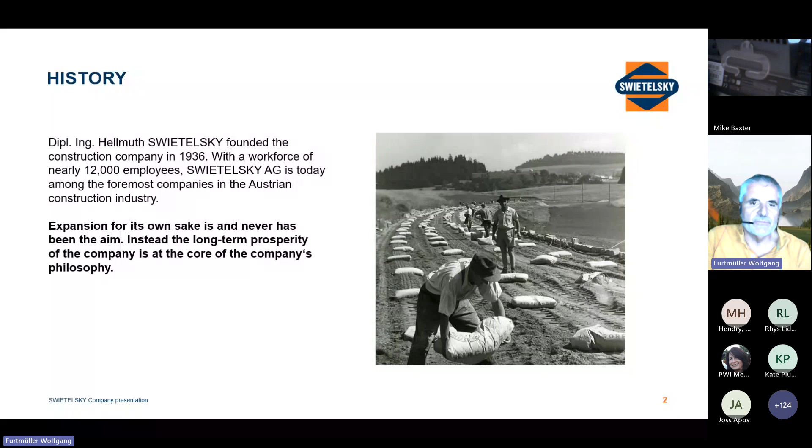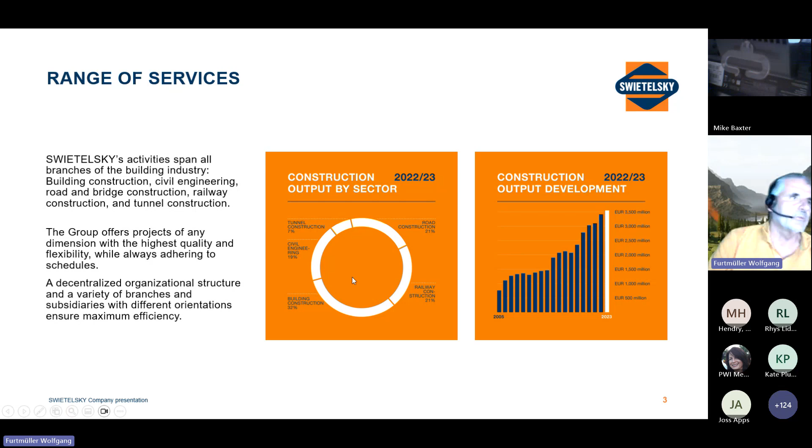At the moment, we have around 12,000 employees. And we have different departments, which are explained here. We have tunnel construction, we have civil engineering, which Atros is also part of, building construction, railway construction, and of course we also have road construction. Total turnover, as you can see here on the right side, is around 3.5 billion euros from last year.

Especially in railway construction, you may know the company already because we are acting in the UK. With railway, we are acting almost worldwide. So we also have a subsidiary in Australia, as far as I know, and all over Europe.

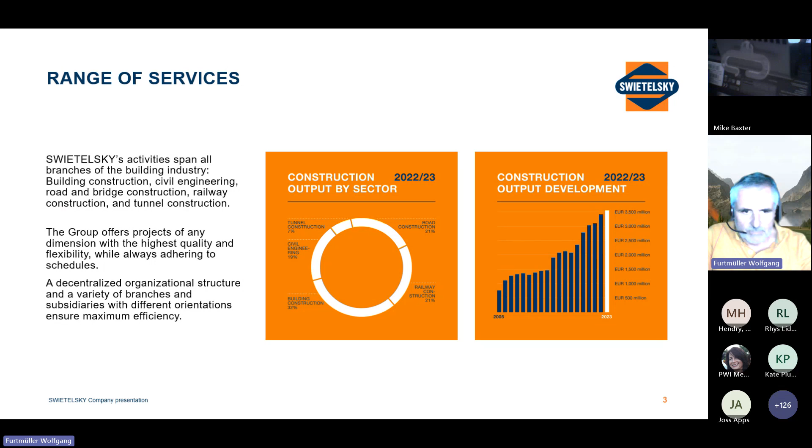Michael Zeitler, I want to apologize for him because he is on an urgent trip and couldn't participate. He is the manager of Swietelsky UK. So now I have a little bit of a problem with my... Okay, next one, guys.

Okay, let's go into Atros. Atros is originally the name, and the company comes from Italy. It was founded in the 70s and taken over by a small Austrian company. And they did the construction quite well in Austria. Atros does everything that means moving construction. So everything that is heavy and needs to be moved, we do this job.

This small company sold, at the end of 22, the company, or this part, to Swietelsky Austria. And as we see, the market for these specialized things is quite limited in Austria. So it's a very small market, and we're trying to establish this now in Europe or even worldwide.

First of all, I want to show you some things which you already know, everything we are doing, and then our newer developments, several projects we already did. This one is insertion on rails. I guess everybody knows insertions. This is quite famous all over to reduce the interruption of the public railway.

You build the construction beside the railway, beside the dam, and then make the excavation on the dam, stop the traffic for 1 week or 10 days, depending on the size, and then you insert this one. Our new part here is we do it on rails. This is developed with the Federal Austrian Railways, has several advantages, of course also some disadvantages. In any case, it reduces the friction and it's quite fast to do.

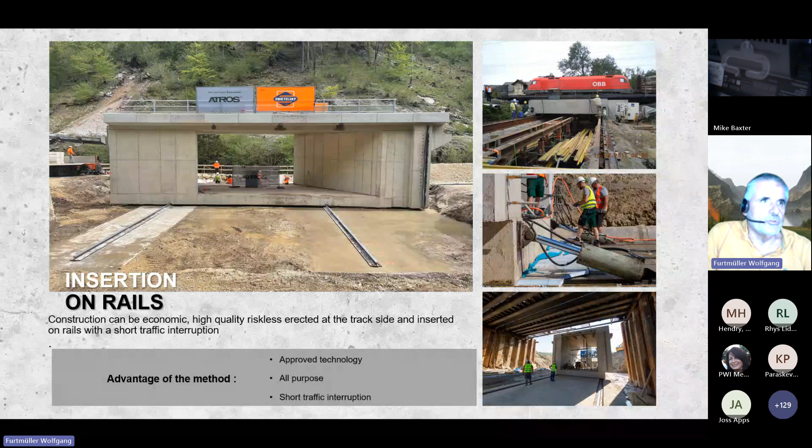Some examples. These projects are all in Austria. One in Golling, 2017. The load, the concrete, was 900 tons and it was 15 meters to move. And the speciality here is you have to lift the whole construction 15 centimeters, which is quite a challenge because there's very limited space.

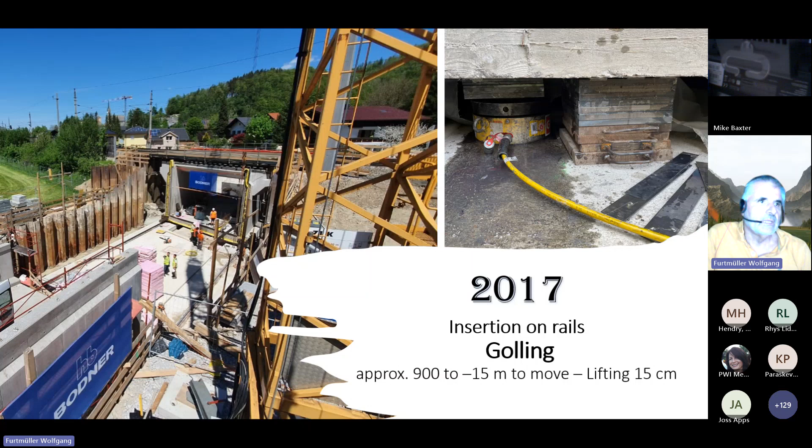Okay, then the other one is Hieflau, weight 850 tons and length of 15 meters. Here on the left side, you can see this picture with this special equipment to move the concrete, to move the whole construction.

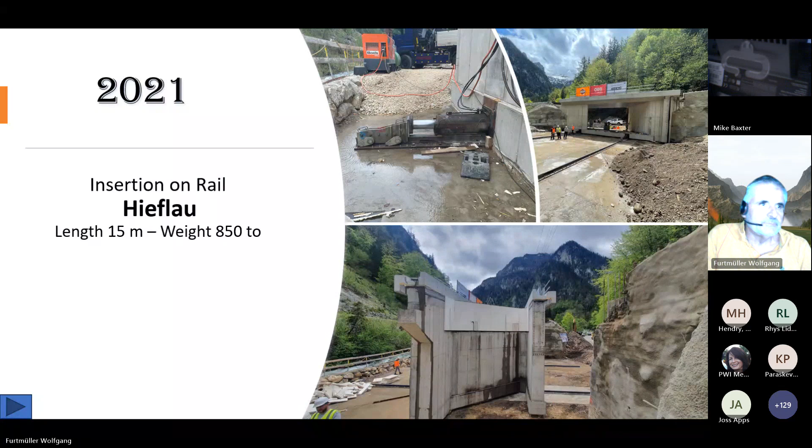I have prepared movies, so please interrupt me and tell me when there is some buffering or it's not running smoothly. We tried it, it works, but nobody knows how stable the line is. Okay, I switched off the music, there is only music.

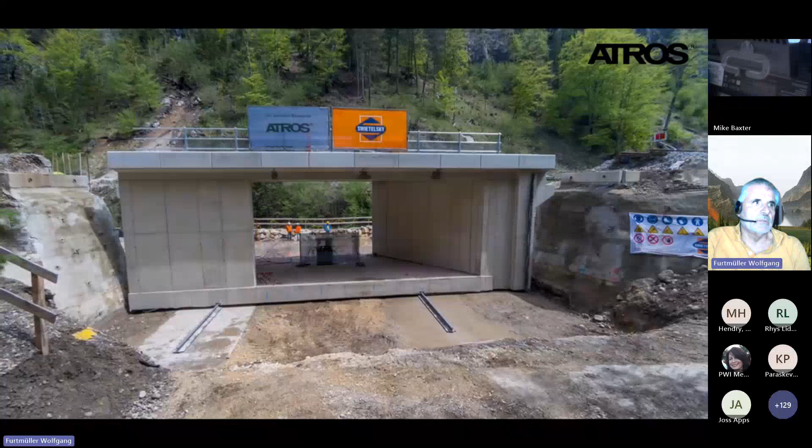You see here the moving itself takes around, let's say, 20 minutes. In 20 minutes, the whole thing was done. And we can then later make a short stop of the movie.

Yeah, here, oops, sorry. This was a mistake. Okay. I don't want... Okay, once again.

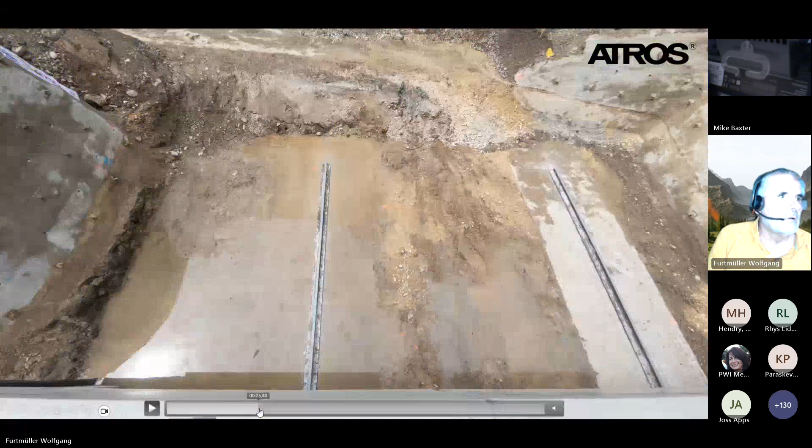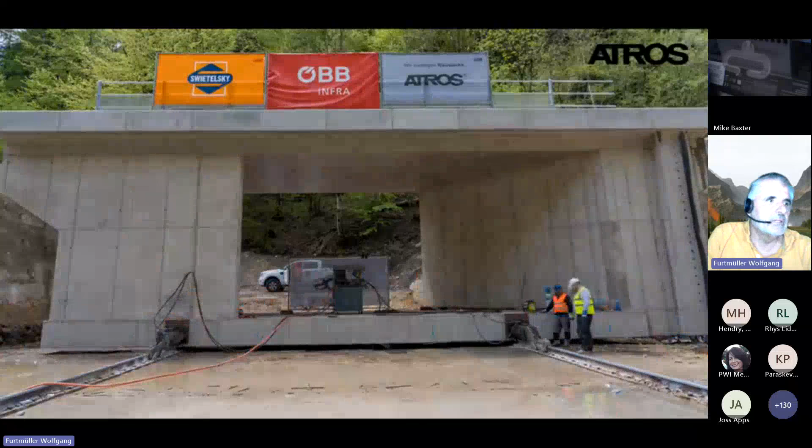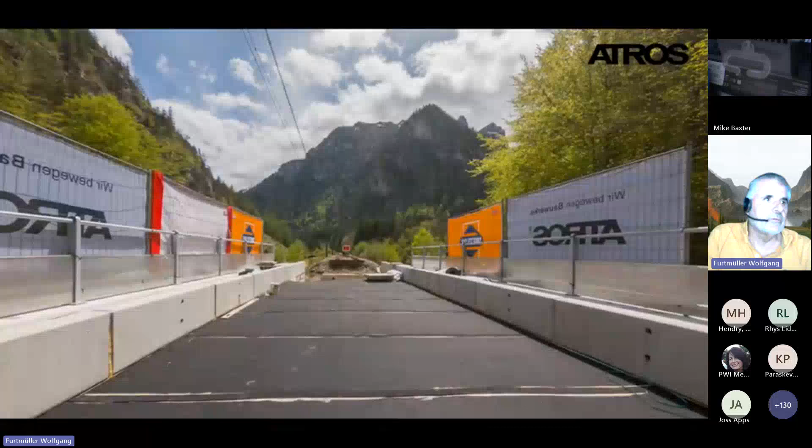Okay, here you see this is the special part. You see the support, how it's supported, and later on you can use the rails. You can also see there is some grease on the top, some special material for sliding. Later on you fill up the embankment, install the rails, and yeah, that's it. But in any case, it takes a few days, maybe 1 week, maybe 10 days, and you interrupt the public transport.

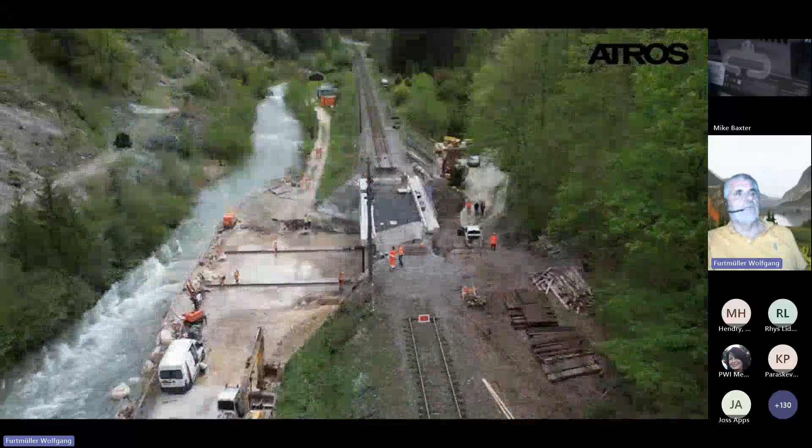Yeah, you see here on the left side, they're already removing the rails. And yeah, so.

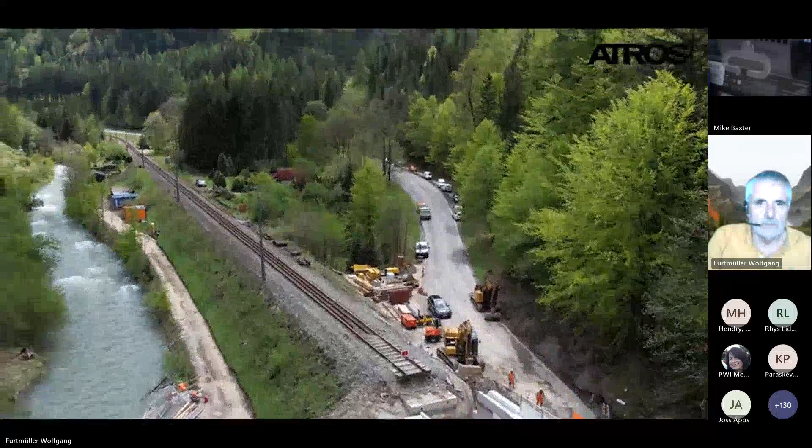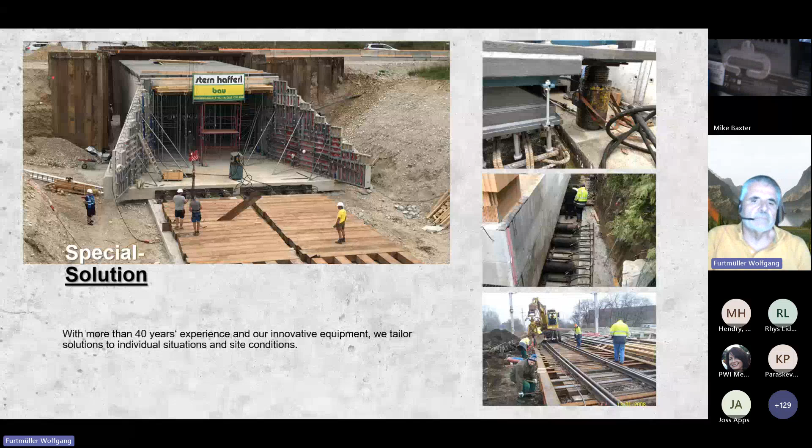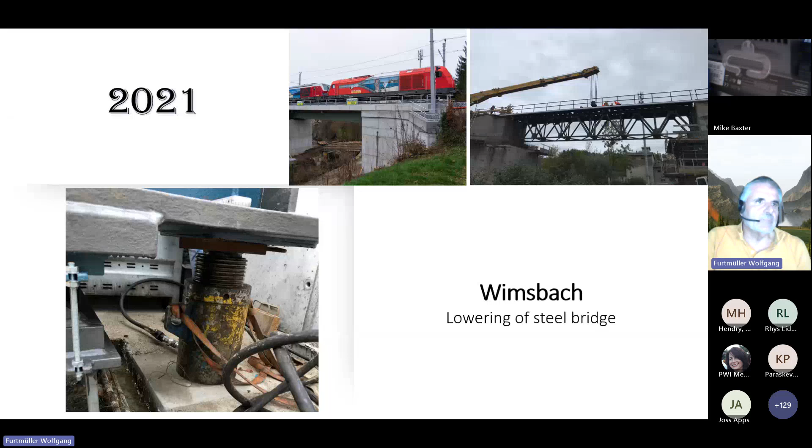Okay, it's finished. We're also doing some special solutions. If there is sometimes, for example, we had lowering of a steel bridge. We're doing also this kind of jobs. We're doing also insertion under a federal highway, because this is basically also possible. But this was only done one time.

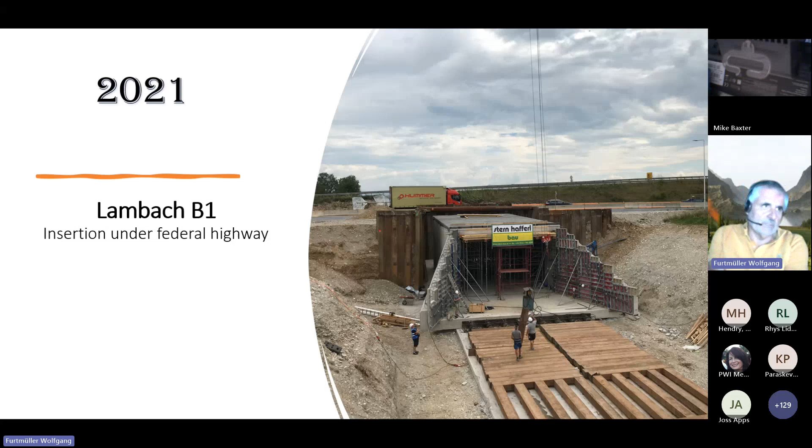In autumn of this year or maybe next spring, there will be a job in Austria for the state highway company. They want also insertion under a highway, so we do it the second time. We're trying to do it the second time.

Insertion of a steel pipe on the hydropower station. Here you can see above this man in the red jacket, this is the flow, the channel. Otherwise you'd have to stop the channel and stop the whole project, the whole electricity production. We insert a pipe under this channel. This pipe is for fish, will later on be a fish ladder.

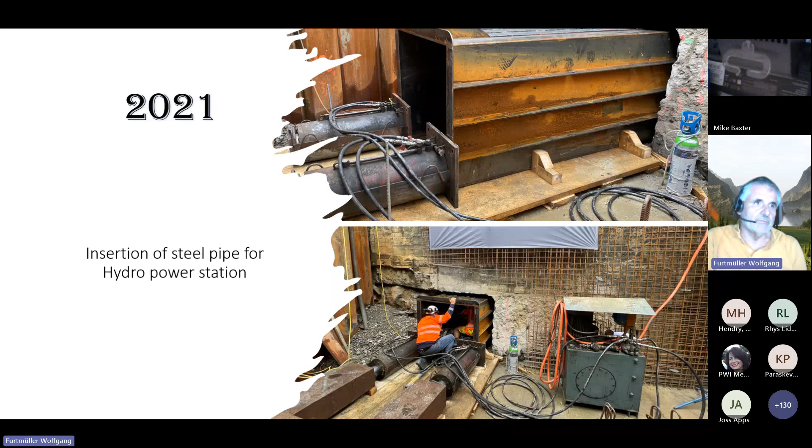And maybe a little bit funny thing was the moving of a single family home. They made a mistake and the family home was 15 centimeters too near to the border. As the regulation is very strict here in Austria, they had to remove the house. This was one possibility, and the other possibility was just to move the whole house 15 centimeters to the other side, away from the border. So this was also possible to do.

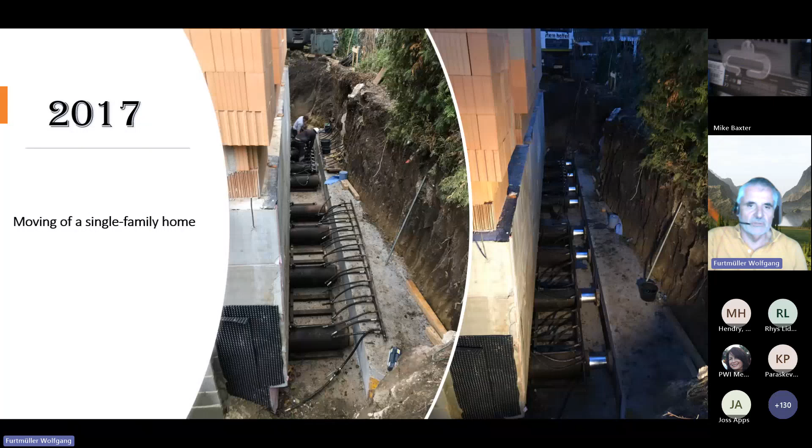So now this is some general overview. Now we're coming to this jacking below tracks, which is a little bit more challenging. Our target was to try to reduce the interruption of the public railways to a minimum, or let's say to zero. And there we had 41 projects, already the experience of 41 projects.

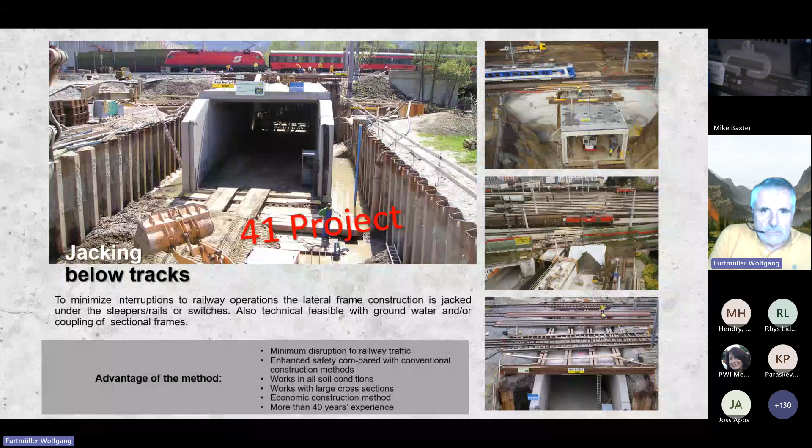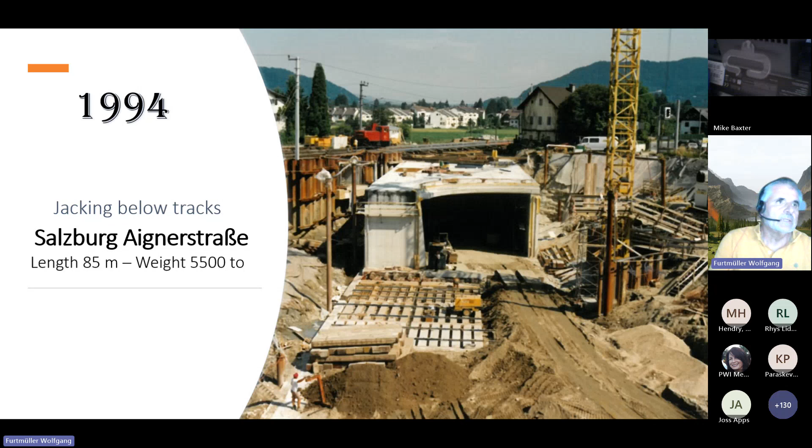You see here how it goes on, and the train runs continuously, of course. We reduce the speed a little bit, to 60, 80 kilometers per hour. There are also some examples. This was 1994, a length of 85 meters, and normally we try to make it rectangular to the track, but in this special case it was not possible, so we had to prolong these temporary small bridges.

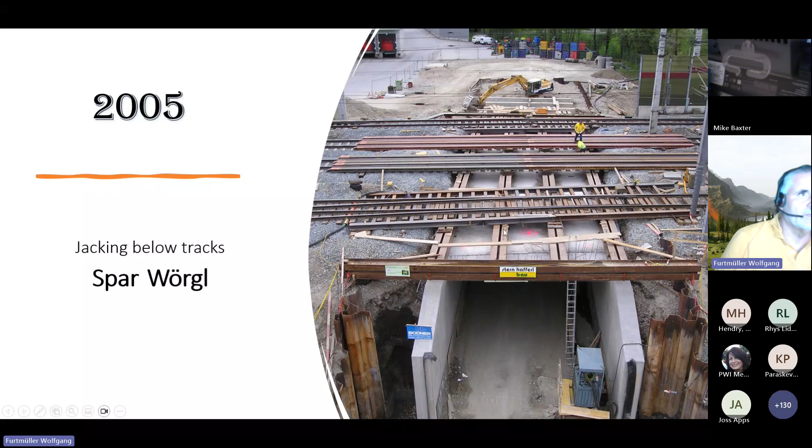But it was successful in the end. Regarding the temporary bridge, I guess this should be well known to you already. You see here, do you see my cursor? Can you see this? It is here beside, let's say, steel bars. Quite easy - there's the rail in the middle, and left and right is steel bar supporting the track, the rail. And this is supported, and later on, as you can see here, this is already supported by the ceiling, supported by the beams that we have.

How we do it - also the moving, one project from 2007, we have a quite good picture. This is tank steel rollers, and on these tank steel rollers we are moving the I-beams here and here to this side. So this will be taken in, I'll show you later on a movie as well. This was taken in, and the excavation is continuous during the moving, doing the jacking.

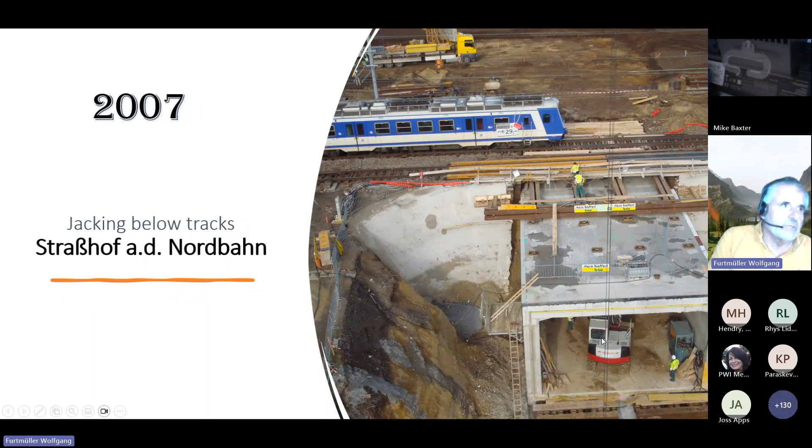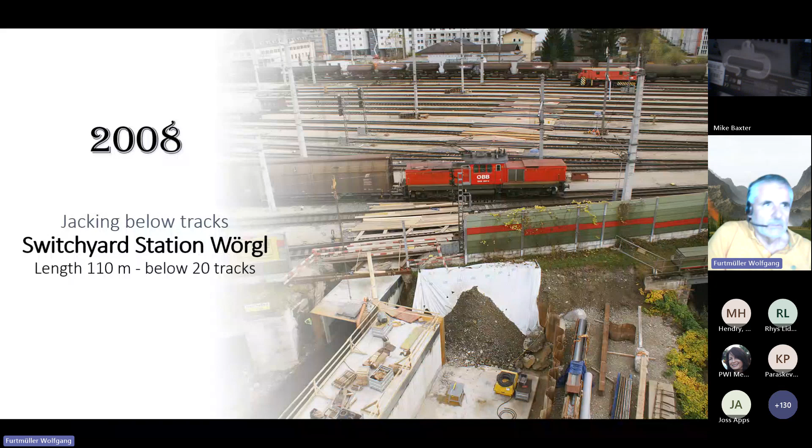One example - so this 110 meters we did not make in one step. We made it in 3 parts. And this goes like a caterpillar: moving, pushing, moving, pushing, moving, pushing, all together at the same time.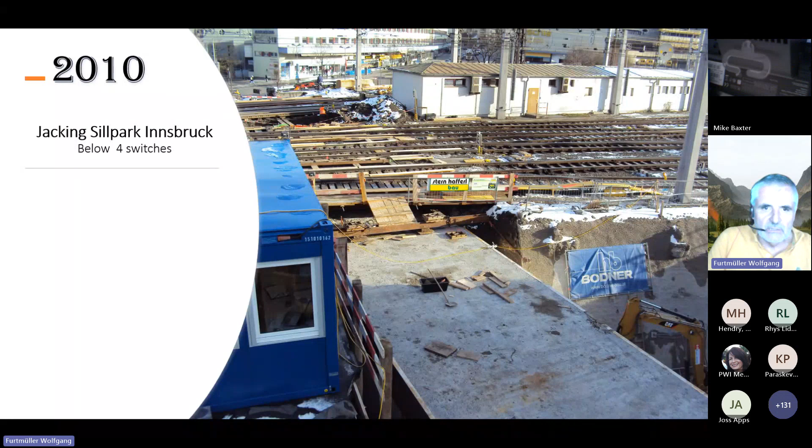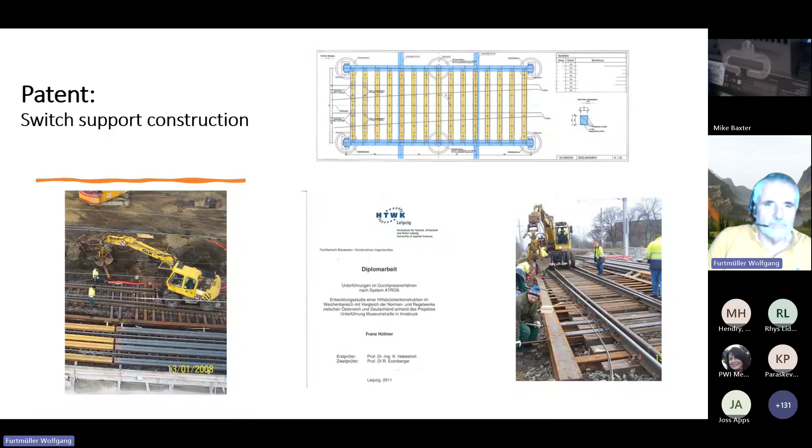Sorry, what I wanted to explain before already - this is below the switches. Below the switches is some extraordinary challenge because it's not that easy. But we also investigated and we got a patent for the switches. And the switches - how to move this one - there is a patent, and there was a master's thesis done for all the static analysis which had to be done. Okay, this is part of the patent.

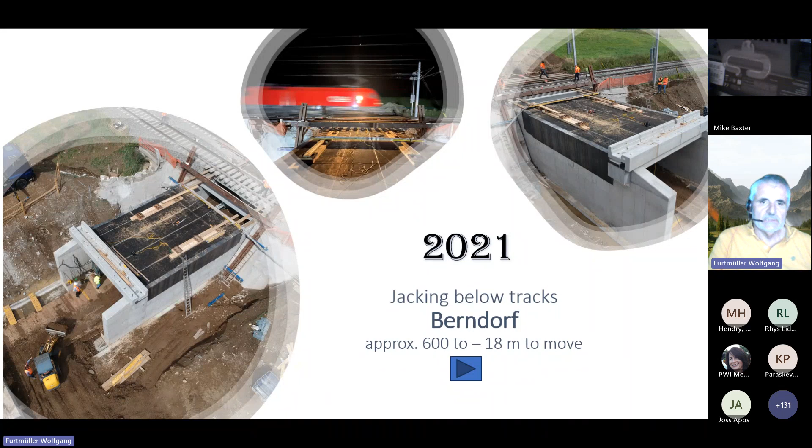Okay, then from our last project in 2021, this is Berndorf. To explain a little bit, this is the connection between the north of the Alps and the south, so from Vienna, as you can understand, to Italy, more or less. So this is also a quite frequently used track, and this you should not interrupt. Therefore, we have a movie also.

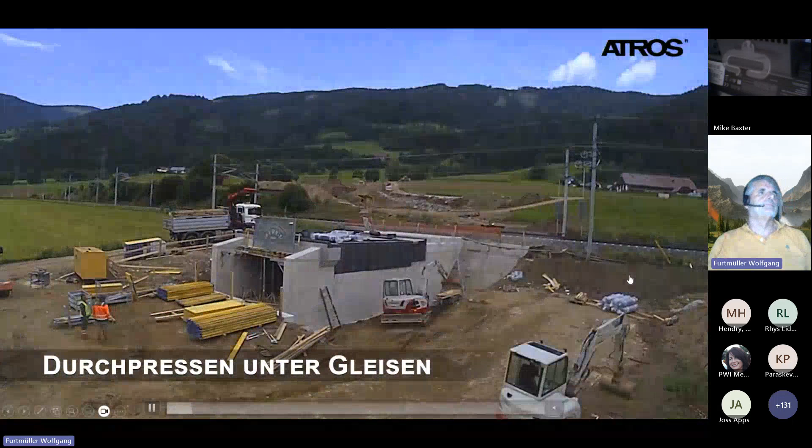You can see we construct this one. You see here this edge. Yeah, this is in front. There is steel, and this one will go through the embankment.

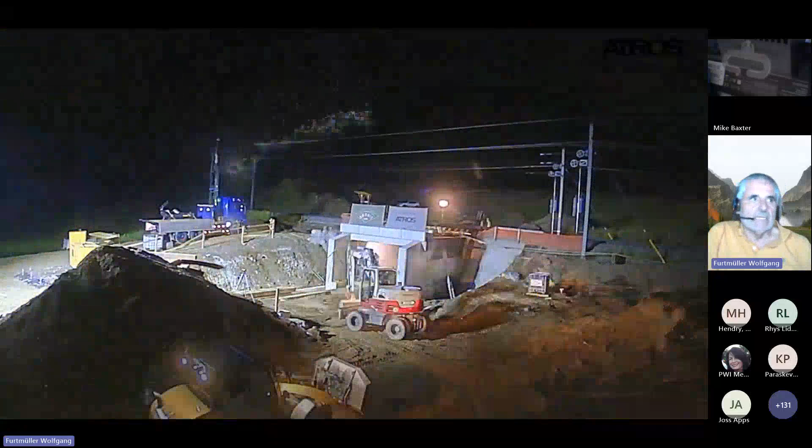Okay, this is the preparation of everything. You see from time to time also passing by a train. So this takes totally 3 days. Yeah, yes, you saw the trains. This is two lines and takes around 3 days, day and night shift.

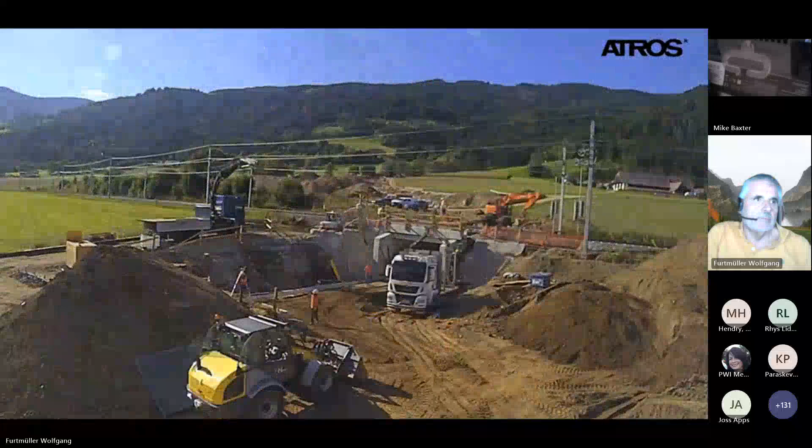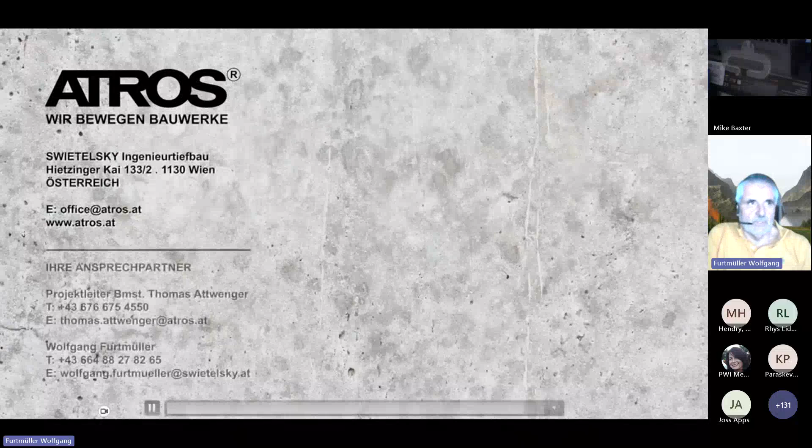Okay, finishing work. Then this side walls and project is finished. Sometimes you can't do it very close under the tracks because the embankment is too big.

And this is the connection between Vienna and Germany, so from East Europe to West Europe, and this is very frequently used. We already have 4 tracks there, day and night under operation. So to stop this one is quite impossible.

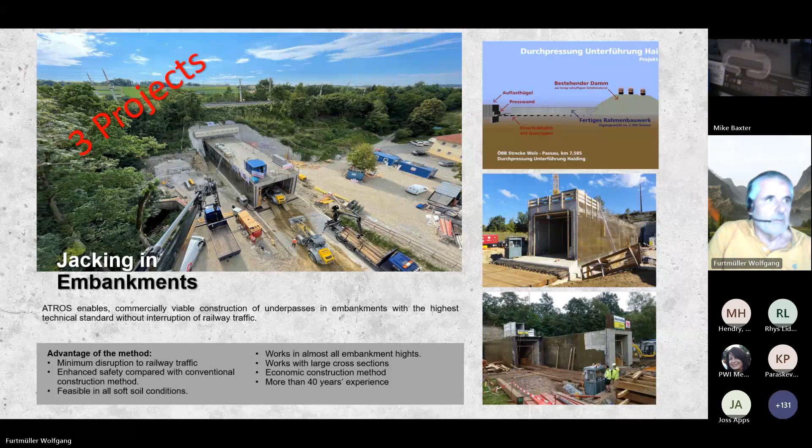Okay, from this one you will see later on movie also. Yeah, this was the project in Germany we did, 2016 in Obervellmar. You see here this steel edge. So this is the cutter or steel cutter.

This is the part which goes through the tunnel, and then you have the side walls left and right side, which will be later on removed. And we go through this one and continuously with the excavation. You see this much better in the movie.

Here you see on the left side in Obervellmar, this is the special case. There was already an existing underpass, but this was too small, too old, so they had space to make a new one nearby, and this one was just closed.

This was also done in two parts. Also again, moving and pulling the other part, first this one in, and then this one to the left side.

Because here, with my cursor around here, was a very famous, beautiful tree, impossible to move. For these reasons, we have to make it in two parts. Otherwise, it would be no problem to do it in one part, which is of course easier, faster, better quality and everything. But okay, impossible to change this tree, so we have to do it in two parts.

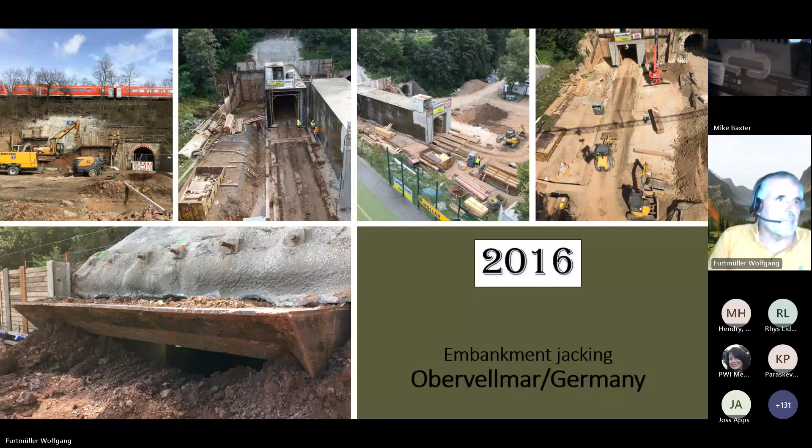2022, this was our last embankment, jacking in the embankment. This was done, as I said already, on this track between Vienna and Linz, or Salzburg is maybe more well known.

This was totally 48 meters long and 3,500 tons. And you can see here, this is the support wall. See here, this is already made.

This is the slab, which later on will be removed, of course. And then this slab, this built the underpass. Yeah, okay. And later on, the underpass was moved inside.

We used the excavation material to make a hill here, or let's say a better abutment, because the longer we are inside the embankment, the more friction we have, and the more pressure we have, of course, also to the other side.

Yeah, so later on you will see this one. What you can see here on the left and right side, there is some pipes. And these pipes, we filled the gap between the concrete and the material, the embankment or the soil.

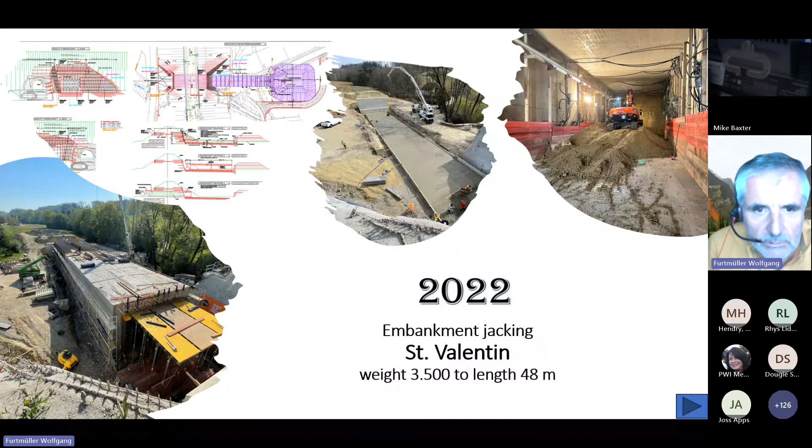Okay, I want to show you now the movie. Okay, why is this not working again? Okay.

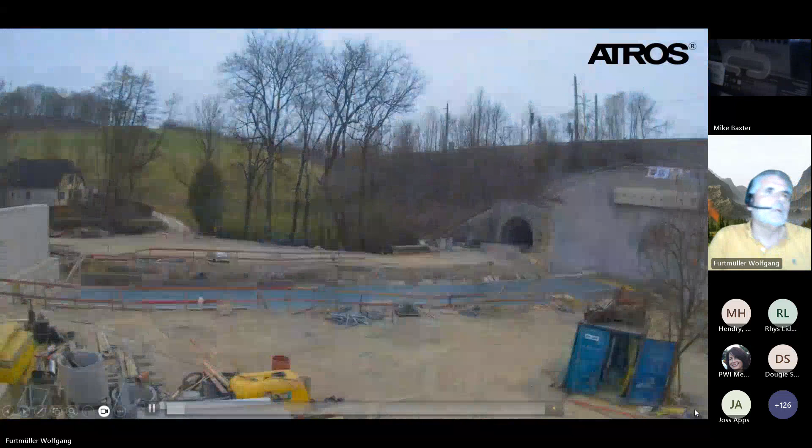Okay, you see here we're building the slab, this sliding slab. Then it's already done, the underpass itself, something like 4.80 meters high and 10 meters, 12 meters in the width.

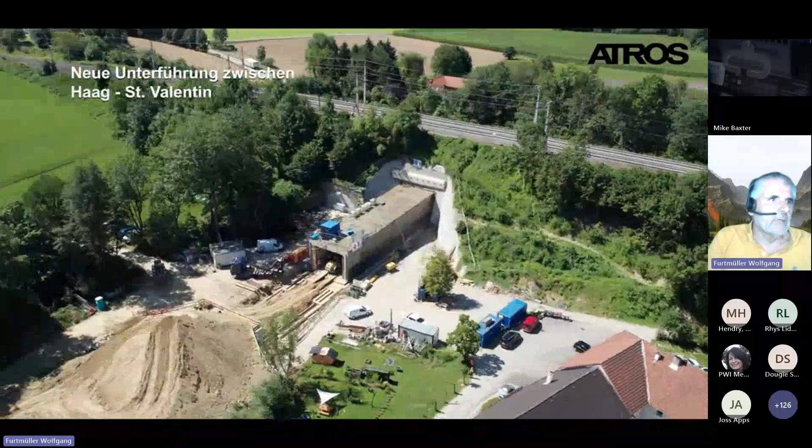Okay, this is half done. Here you see the temporary support. This is anchors going through the dam, which is supporting the dam. And of course, we have a little bit of settlement.

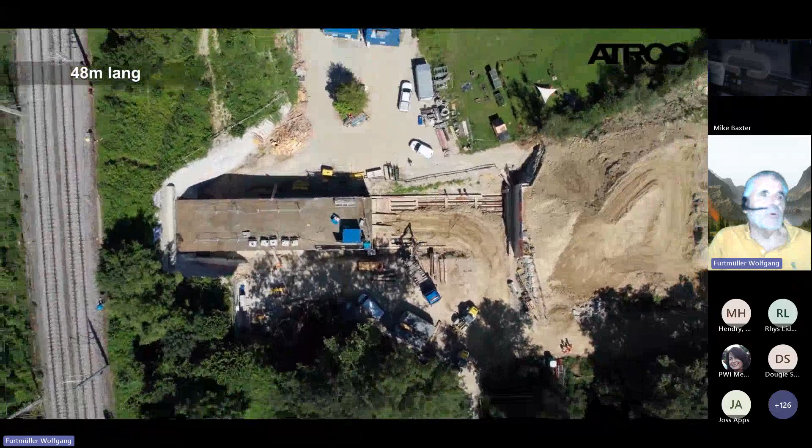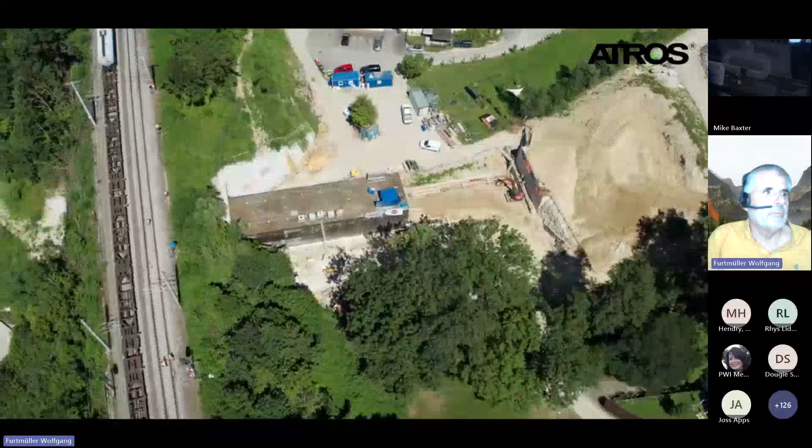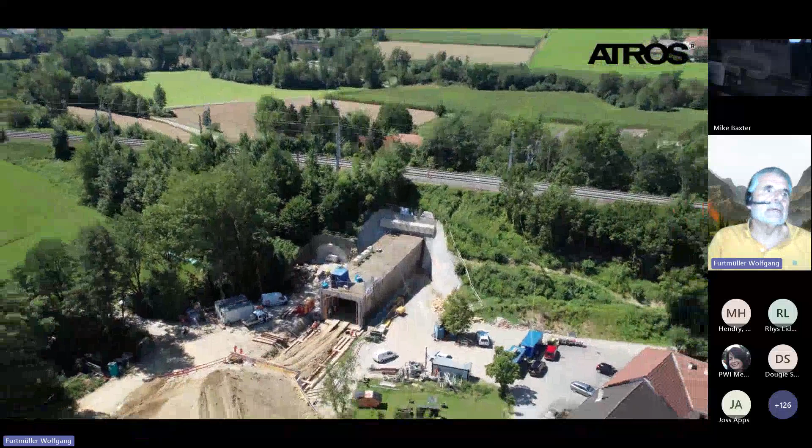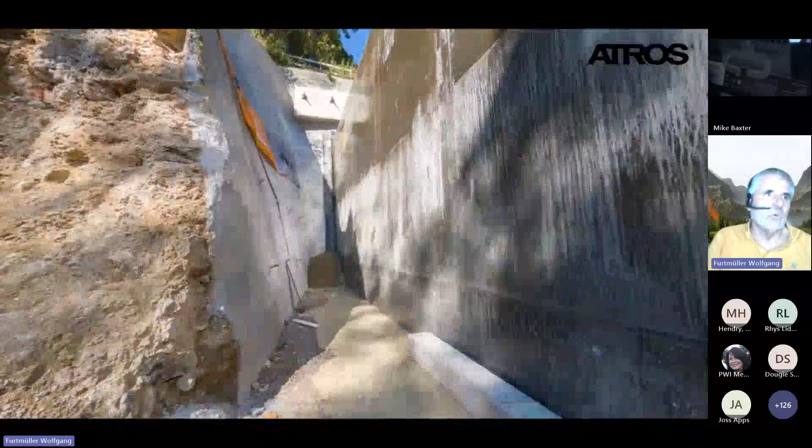You can see here during the moving, the lines are in full operation. We have a little bit of settlement, and we have a quite strict measurement system, which was given by the railways, the Federal Railways of Austria, with a warning, and later on we have to work on the ballast a little bit, but this happens only one time because we have a total settlement of something like 8 centimeters, depending on the whole length.

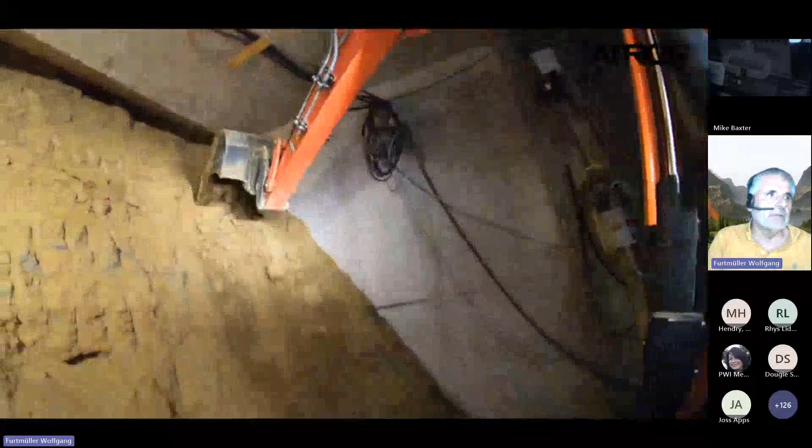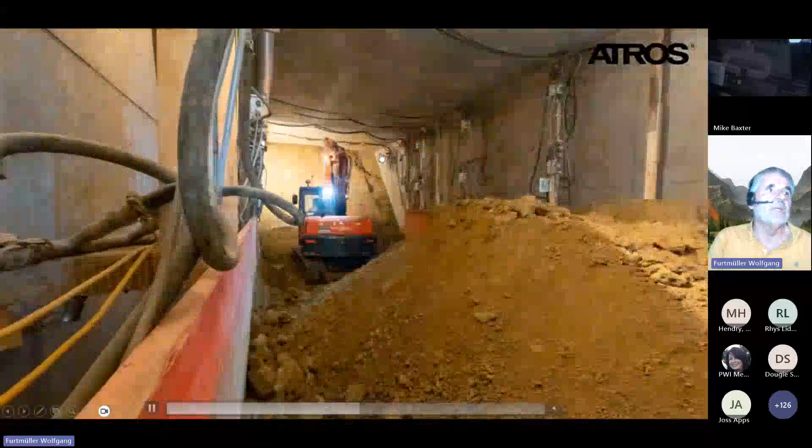And we did not reach the critical part. You can see the excavation. This is the wall, the side walls, and the inclination of the side walls, depending on the soil character, according to the soil investigation, or water, because even in water we did this. Yeah, this is the mucking.

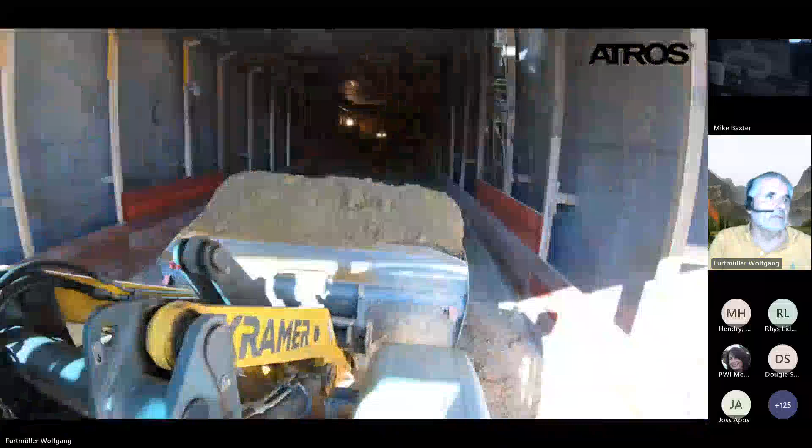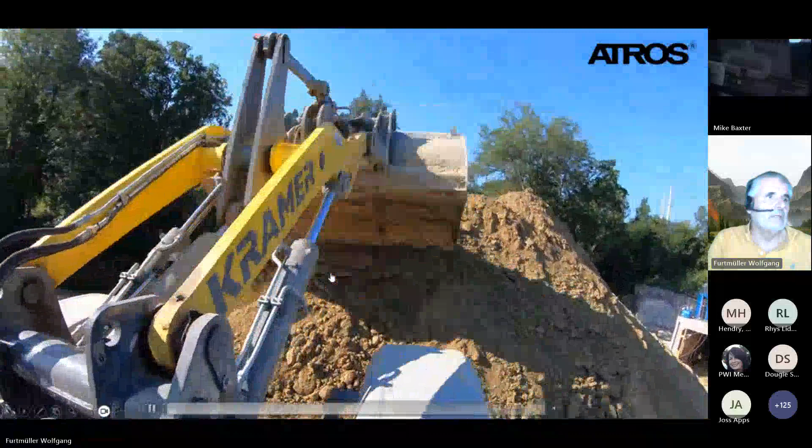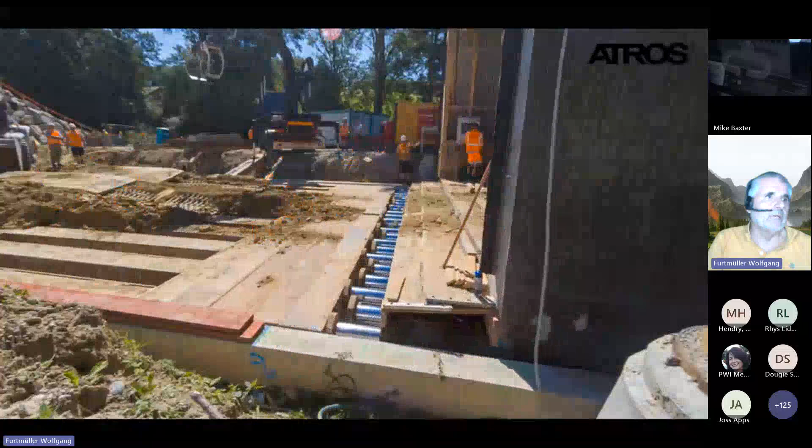And here we fill this hill as a support for the abutment wall. Yeah, okay, you see moving, and then we insert these steel bars.

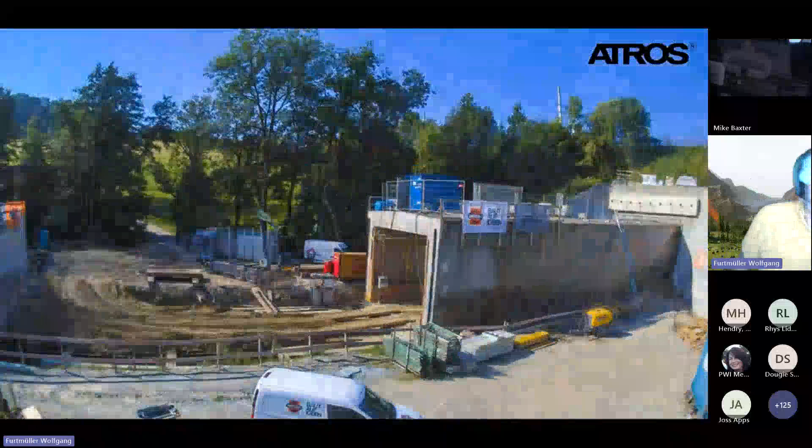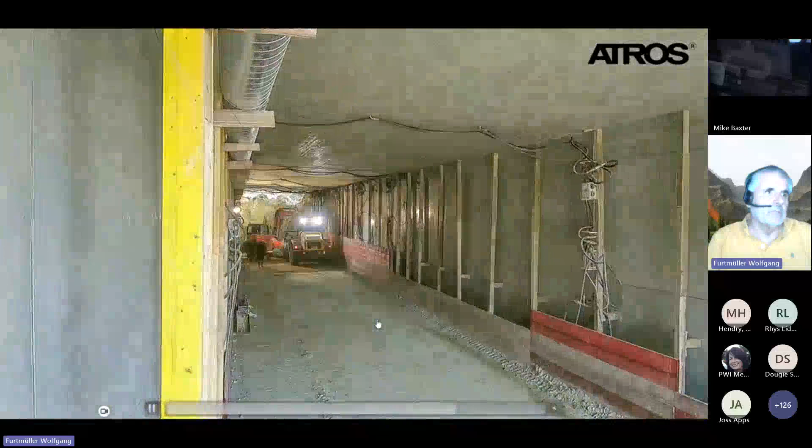Okay, this is already done. Sorry, this was very short. After the half, we removed this one and prolonged it, because this was too long, and the unforeseen loads, we could not control this anymore.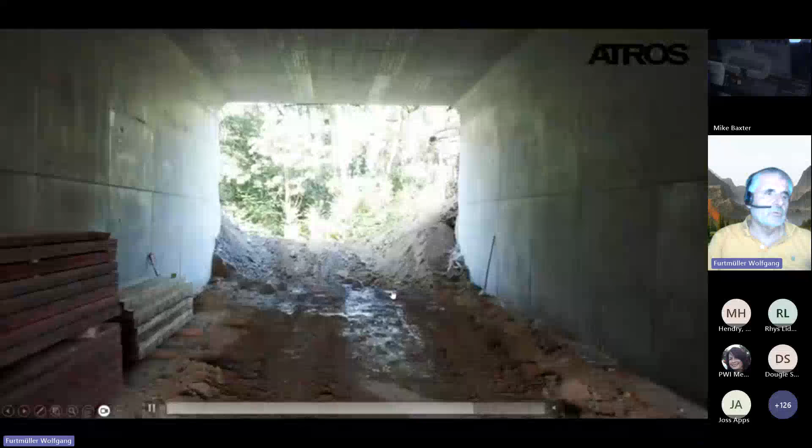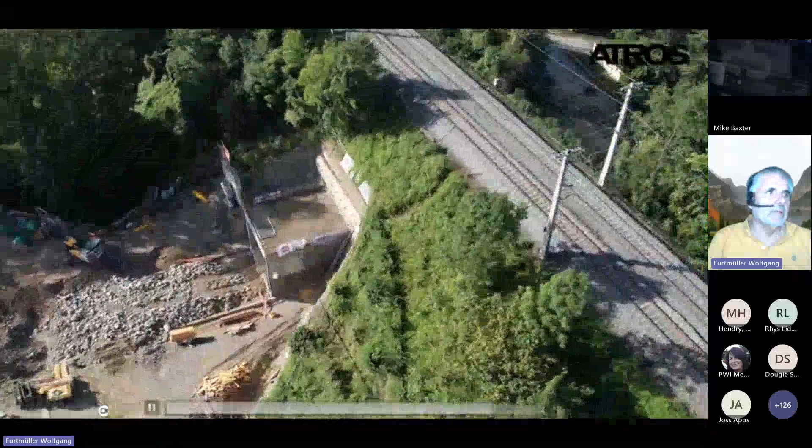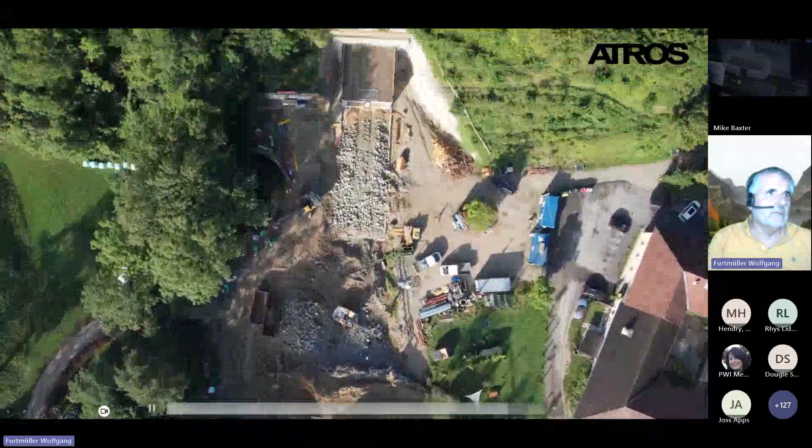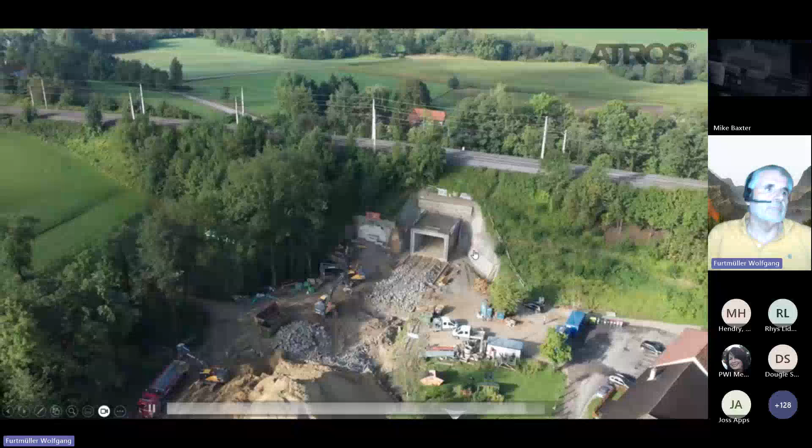So it was in the plan and done also to make a concrete slab again, which was done over a weekend, then destroying these concrete slabs, and filling again the embankment, left and right side, and here the cutting shield or cutting edge. This was also later on destroyed, and then the project was finished.

Yeah, more or less this was my presentation. I hope I'm on time, 30 minutes, and if there is any question, please let me know. I'll try to answer.